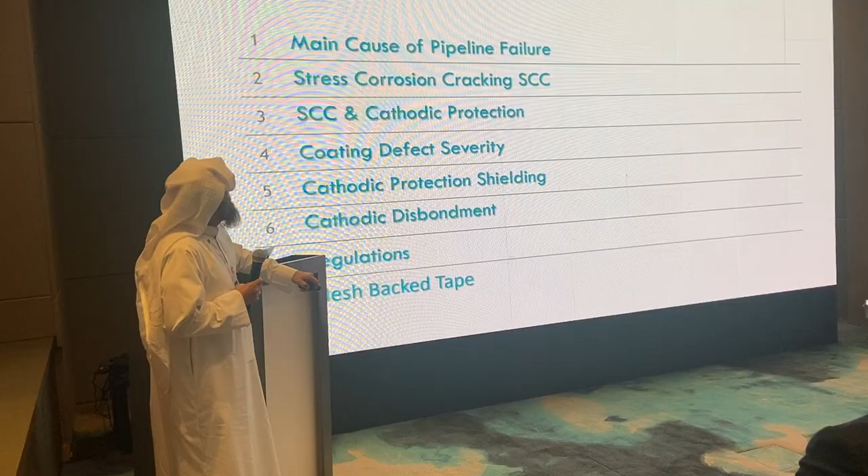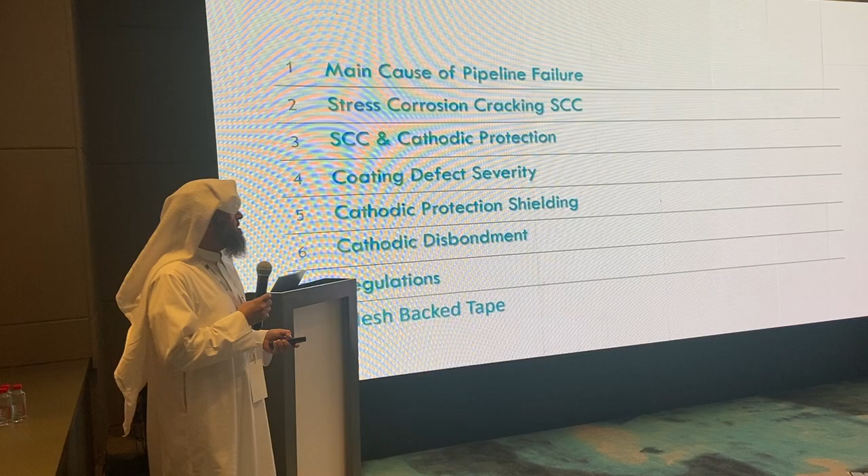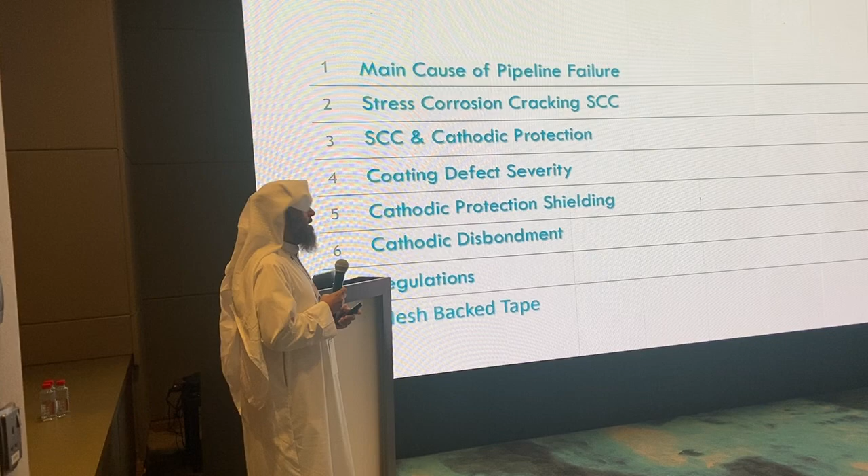This is an overview of my presentation. I'll talk about the importance of the subject, then focus on stress corrosion cracking as a main cause of pipe failure. After that, I'll discuss the relation between stress corrosion cracking and cathodic protection, then coating defect severity, ranking the most severe to least severe defects. I'll talk about cathodic protection shielding, define it and explain its importance, then discuss cathodic disbondment, regulation changes, and finally mesh-backed tape.

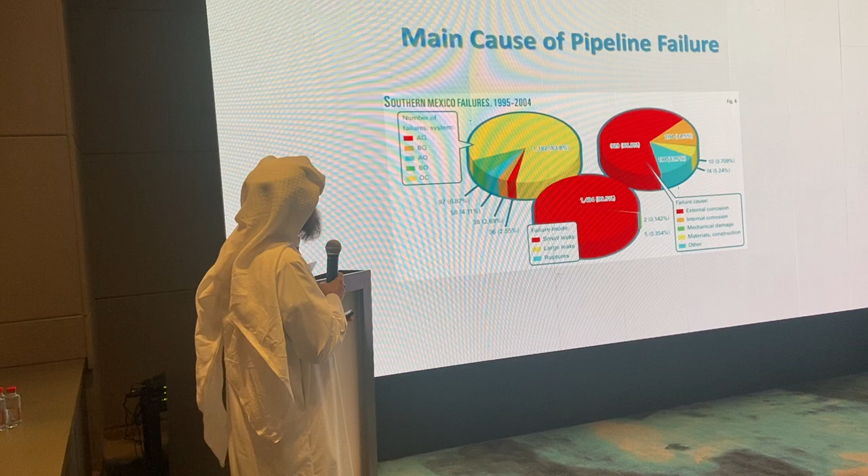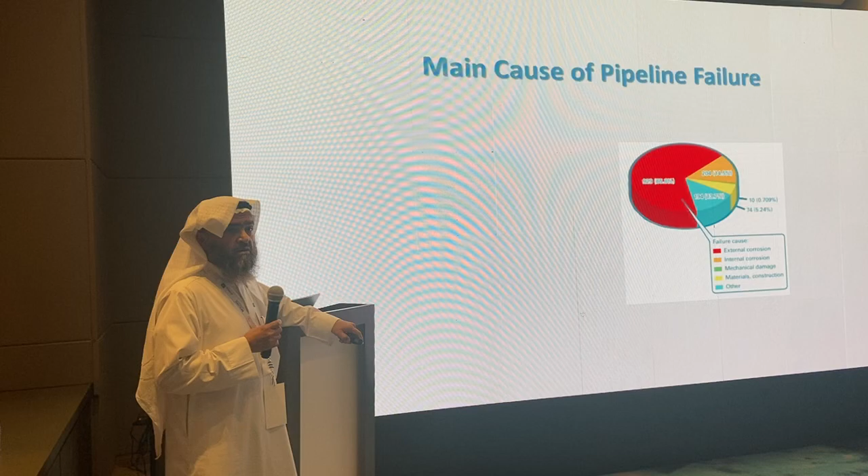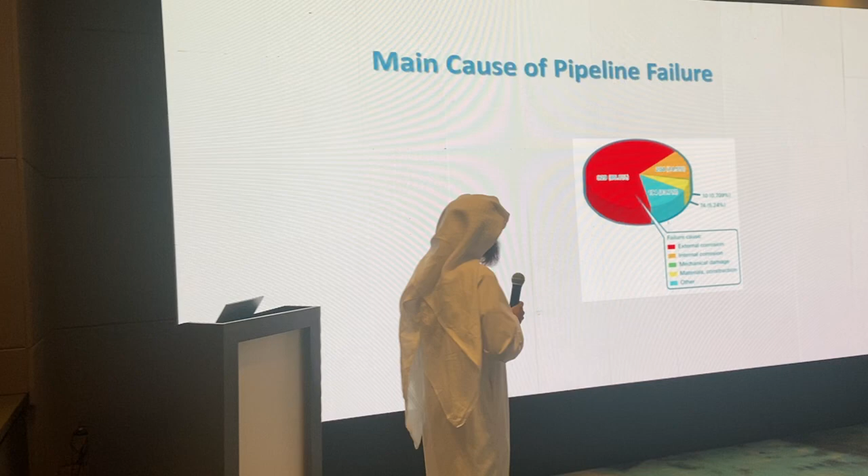This is a study carried out in the southern part of Mexico over 10 years for a gas pipeline. In this study, they observed that two-thirds of the failures are caused by external pipe corrosion. Most UT detection methods only find internal corrosion, which is very minor and minimal. Two-thirds are from external corrosion, and internal is only 10%, shown as the orange portion.

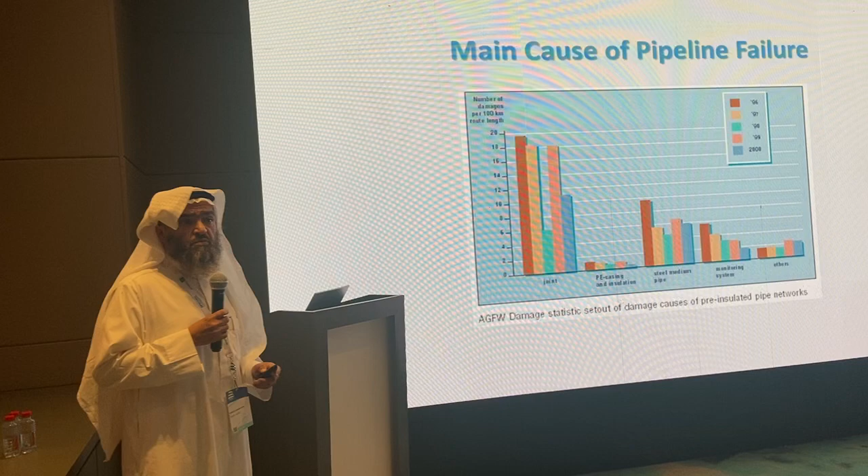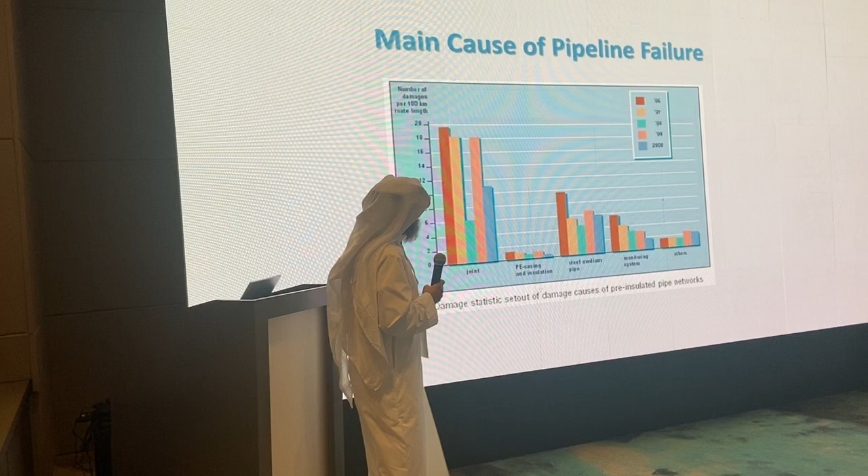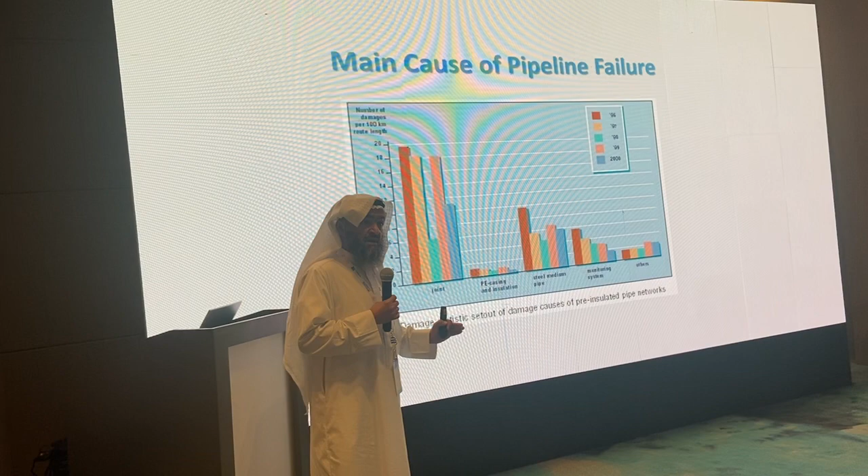This is another study in Germany over 5 years, and they observed that most of the failures are caused at the pipe joint. If we combine these two studies together, we come to the conclusion that girth weld external protection is the vital part of your project, which doesn't even cost 1% of the total project cost.

As I said, stress corrosion cracking is the most important corrosion cause that makes pipes fail, mainly because it is catastrophic and unpredictable. You might have a failure in your pipe system in 2 or 3 years from starting operation. The main cause of stress corrosion cracking is the availability of CO2 in your soil.

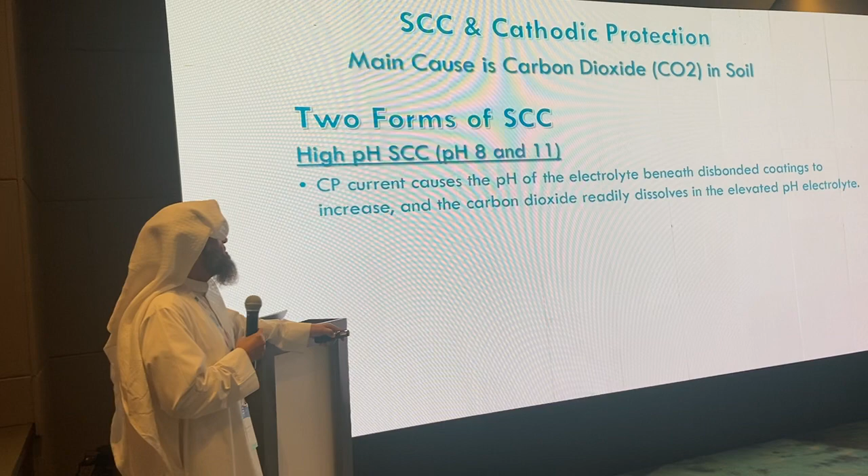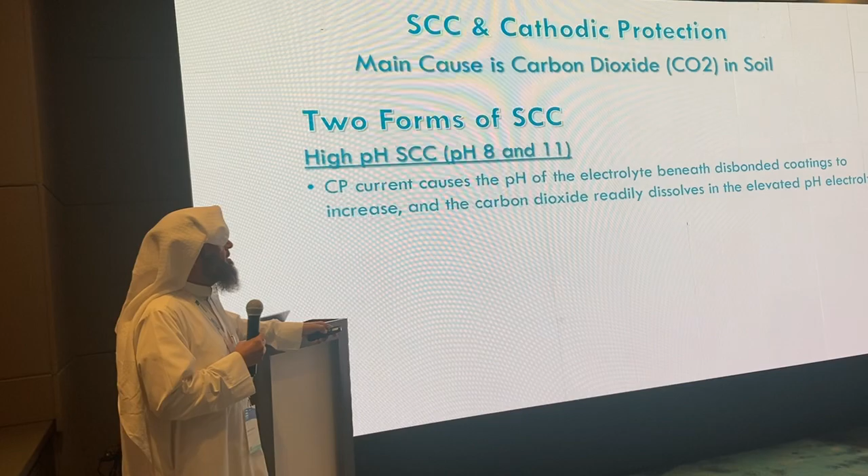There are two types of stress corrosion cracking. High pH stress corrosion cracking, where the pH is above 8. In this type of failure, the CP current causes the pH of the electrolyte beneath the disbonded coating to increase. This increase in pH makes the carbon dioxide readily dissolve in the elevated pH electrolyte. Also, excessive CP current causes cathodic disbondment.

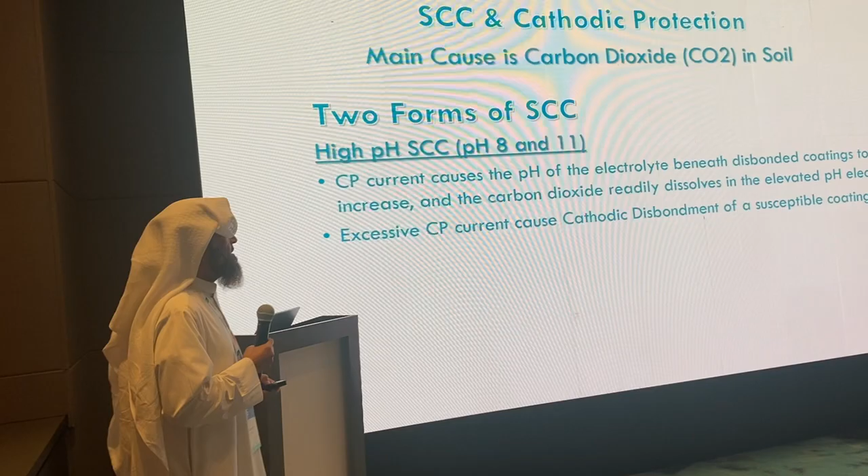Susceptible material can disbond. If you know what cathodic disbondment is - if you put two layers together and adhere them, because they are made of different materials, if you pass a current through them, there will be a field that causes a repulsion between these two layers. This repulsion depends on two issues: one is how electrically resistant these materials are.

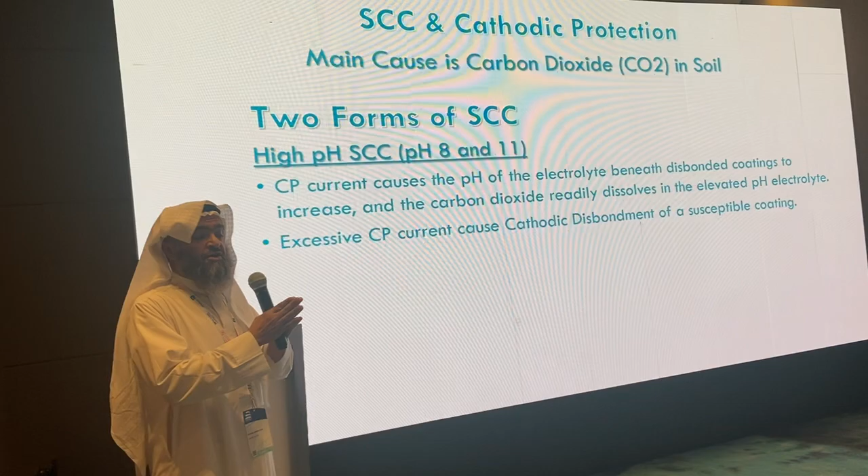Second is the adhesion between these two layers. So to minimize cathodic disbondment, we need to use materials that are electrically isolated, have high electrical resistance, and have very strong adhesion between the two.

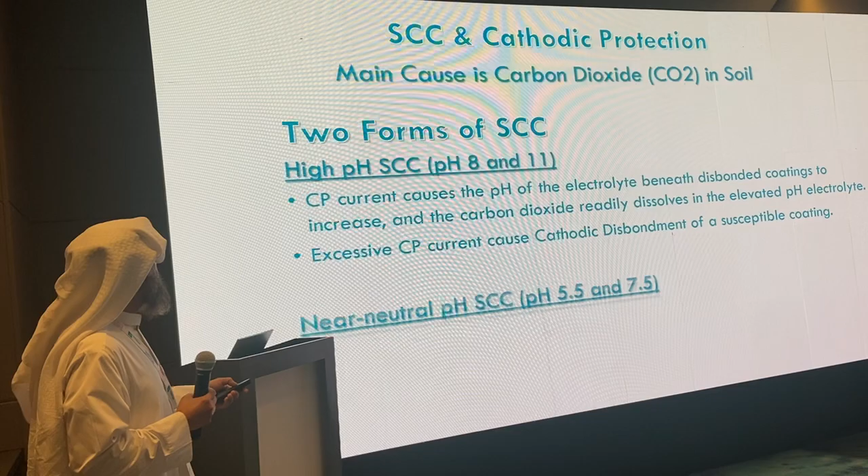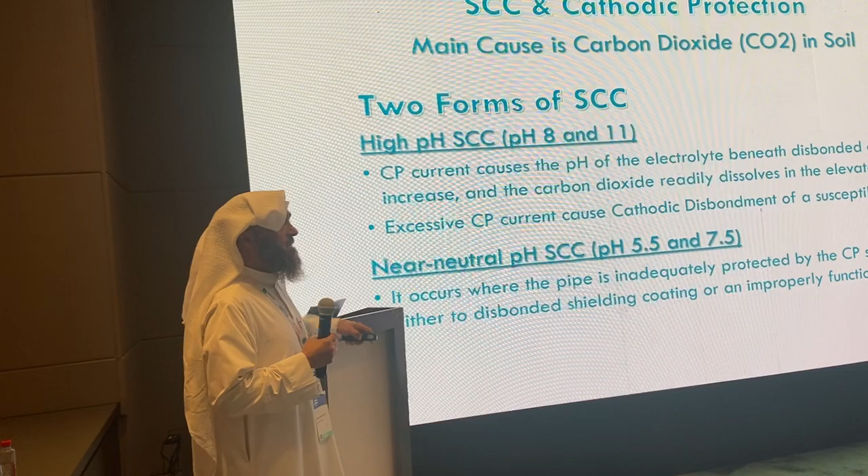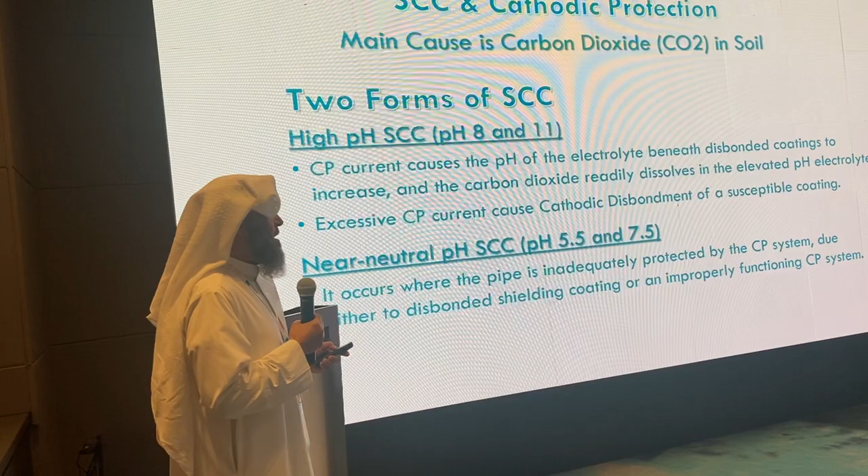The second type is near neutral pH stress corrosion cracking, where the pH is less than 8. In this type of corrosion, it's mainly inadequate CP reaching the steel substrate. So if you have either disbonded coating or the CP is malfunctioning, you will have this type of stress corrosion cracking.

FBE is known to conduct CP because its electrical resistivity is very low. So if there is no holiday, FBE will not cause corrosion and will not cause shielding of the cathodic protection.

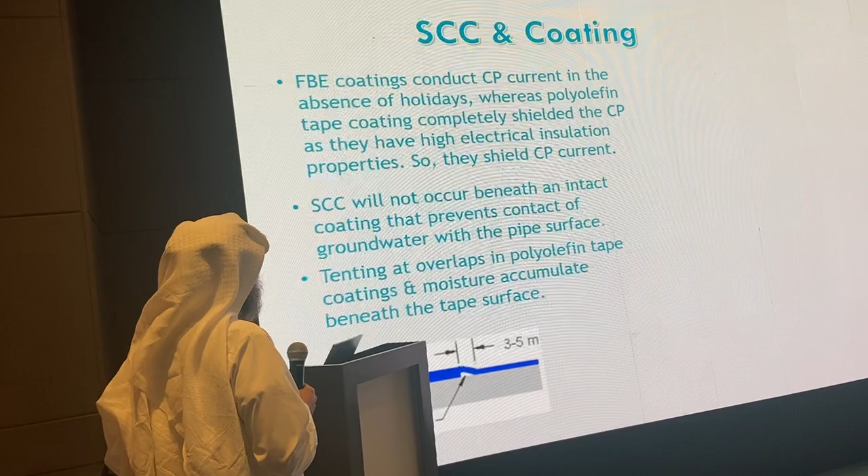Whereas all polyolefin tapes do shield CP because their electrical resistivity is very high. Did you know, for example, the HSS heat shrink sleeves are tested at 25 kV? Stress corrosion cracking will not occur beneath an intact coating, so good adhesion will prevent shielding of CP.

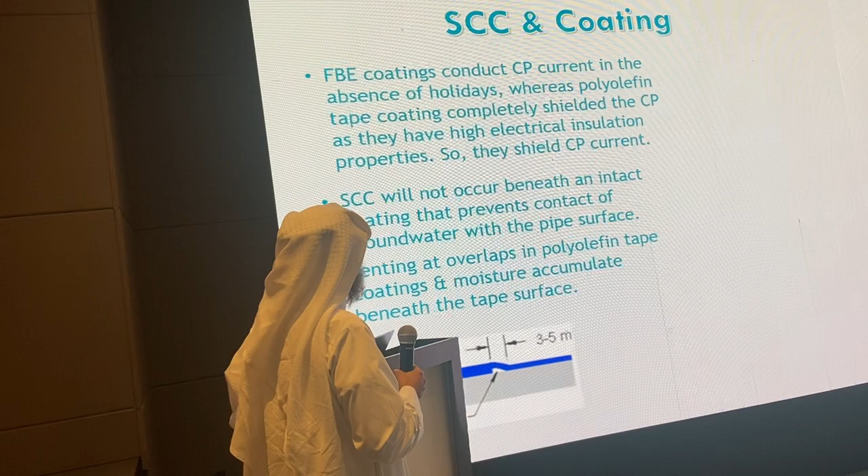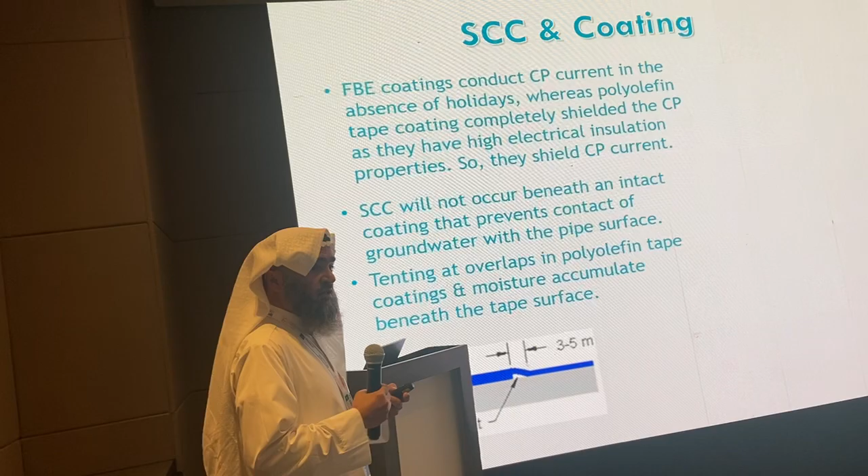Then tenting at overlap in polyolefin - you can see the picture where you have a tent because of the tape. These tenting locations are where water accumulates, humidity increases, and electrical resistivity increases also.

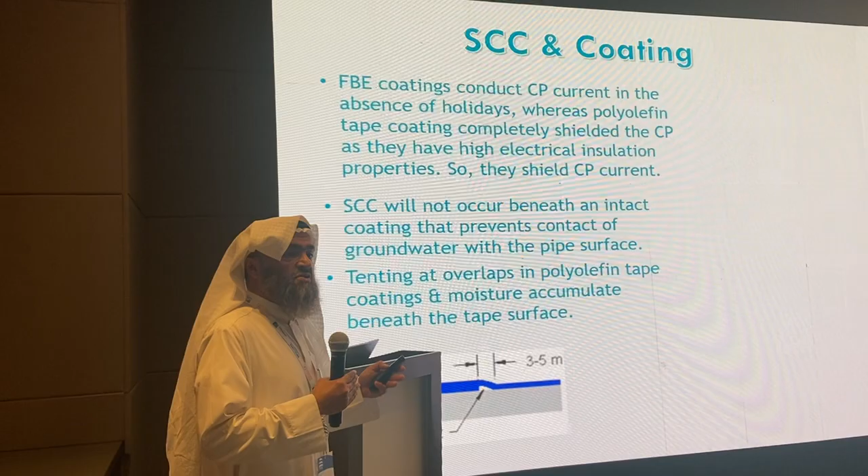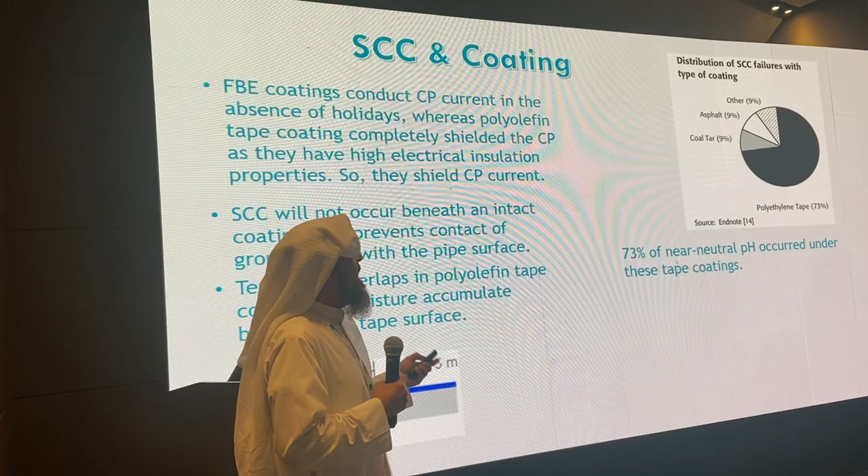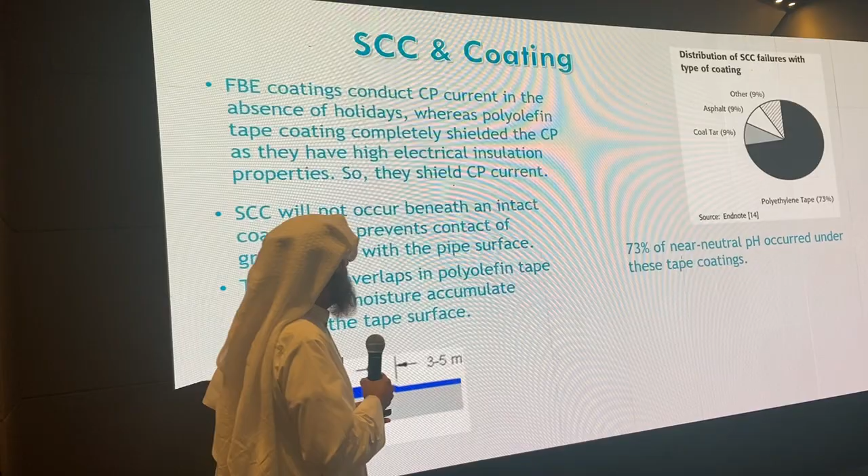73% of near neutral stress corrosion cracking occurs with polyolefin tapes. 73%, two-thirds to three-quarters of the failures we get are from using polyolefin tapes, including PE, PP, PVC tapes, and tapes that are outer-wrapped by PVC - all are included in this.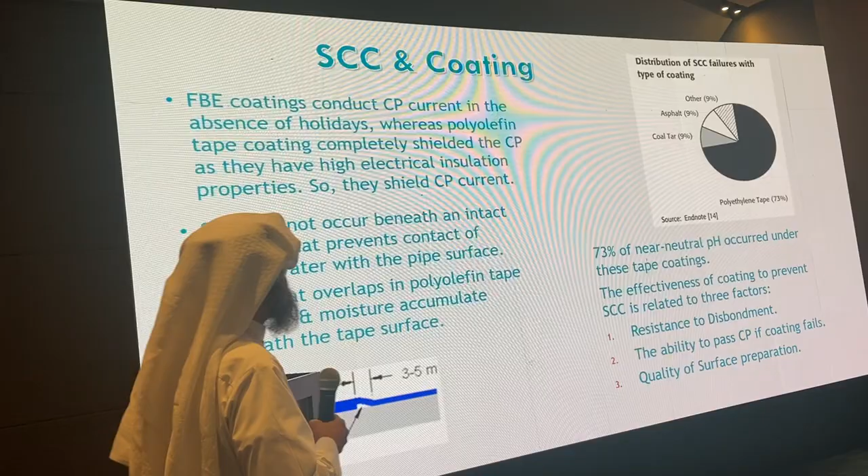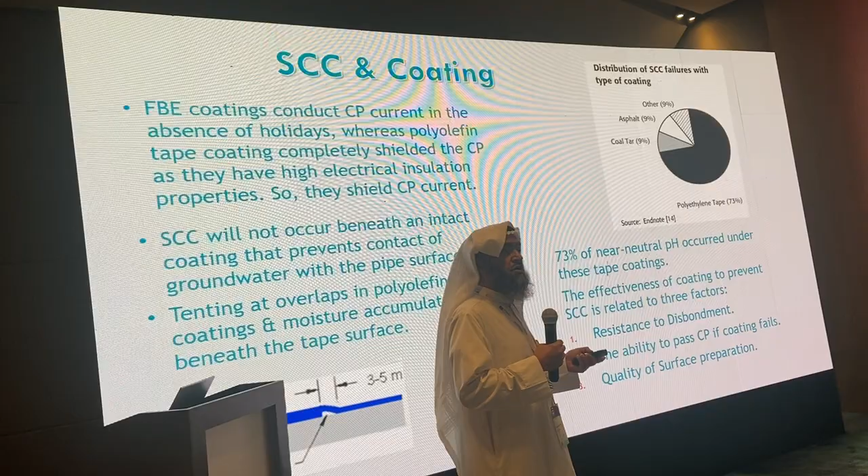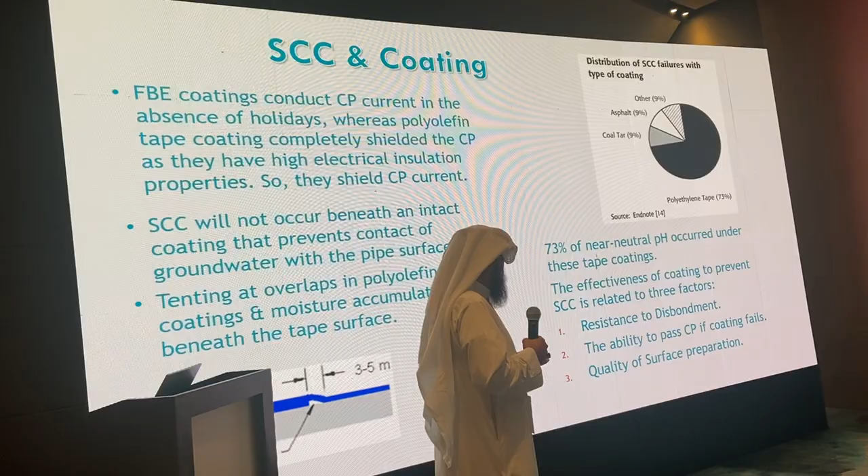So to eliminate this effect and make the coating more effective, we need to resist disbondment through good adhesion, by using coating that has less electrical resistance. Second, to encourage or support the CP current through the coating, what's called fail-safe, which I will talk about, and then the quality of surface preparation.

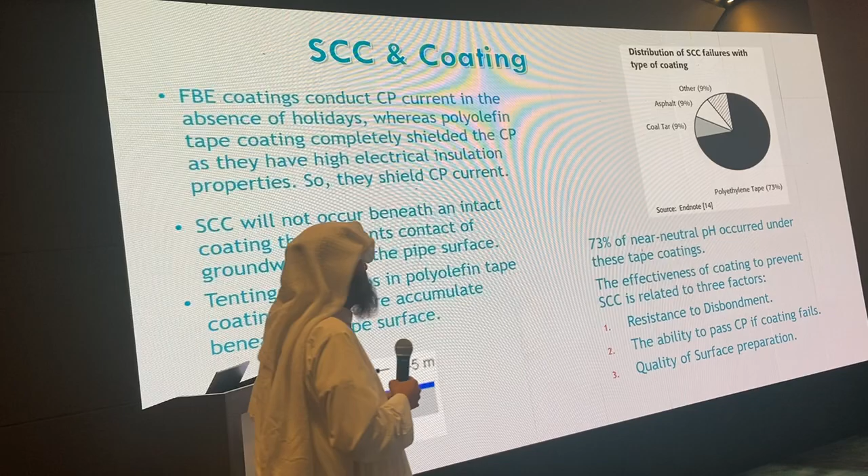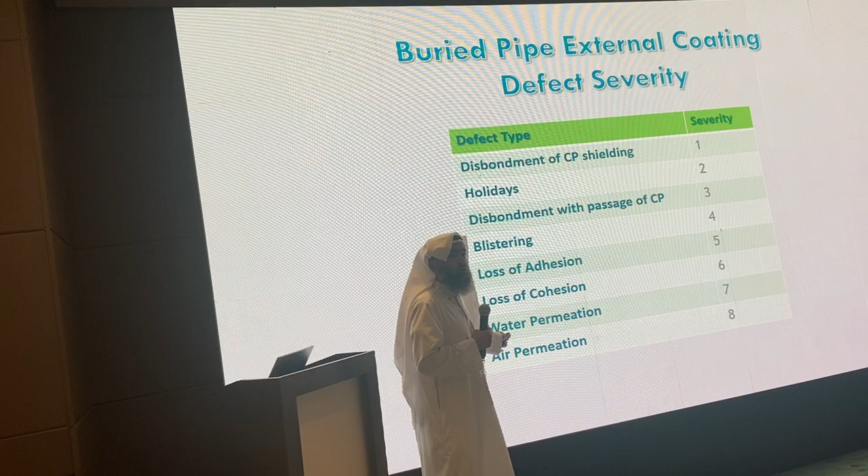These are the list of the severity of coating defects. We used to think that water permeation is the main cause of corrosion, which is not actually true. The main cause of stress corrosion cracking in general and localized corrosion is disbondment causing CP shielding.

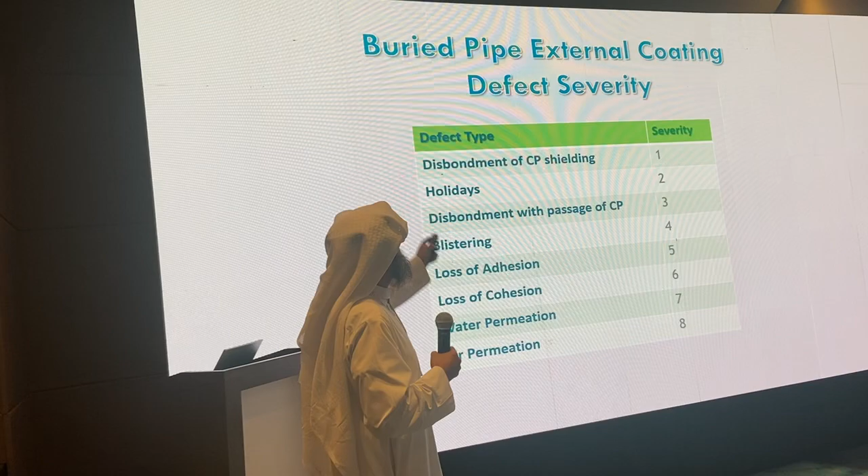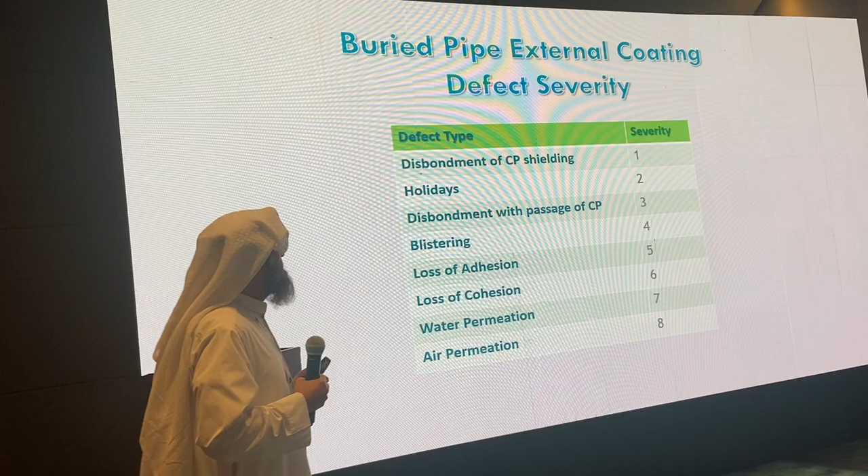Second is holidays. Third is disbondment of coating that gives little CP passage. Then blistering, loss of adhesion - which is very important - loss of cohesion. Then last is water permeation and air permeation.

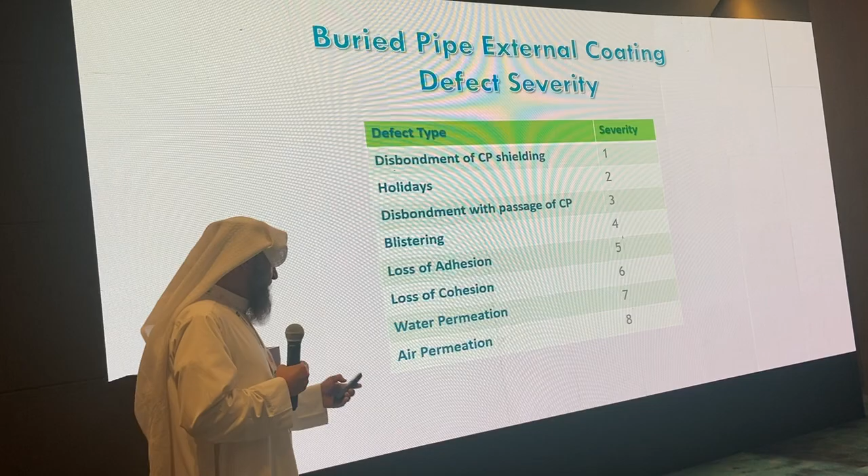Now, what do we mean by cathodic protection compatible? We mean that if the coating fails, it will allow the current of the CP to go through. If it protects or prevents or shields the cathodic protection, there is no use then to use the cathodic protection.

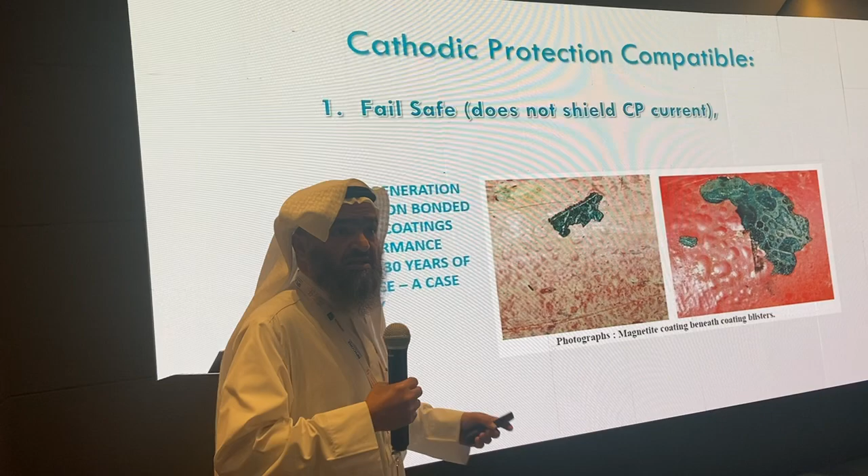An example of fail-safe material is FBE. This is a first generation of fusion bonded epoxy, where, as you can see, it is very poor type with a lot of blisters. Nevertheless, there is no corrosion - it's all black magnetite, no trace of corrosion. Why is that? Because FBE doesn't shield your cathodic protection.

Second is to have a coating with minimal cathodic disbondment. How to get that? First, use a coating that has low electrical resistivity. Second is to have a very strong adhesion.

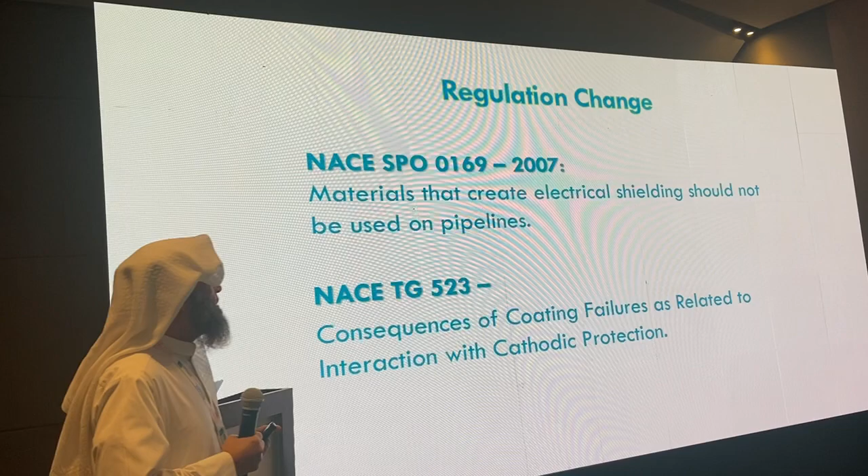Now to the regulation. I took these regulations as copy-paste from their website. In 2007, 15 years ago, the United States recognized the problem and stated very strict regulation on this. For example, NACE says material that creates electrical shielding should not be used on pipeline, period. They even created a task group to study the consequences of coating failure as related to interaction with cathodic protection.

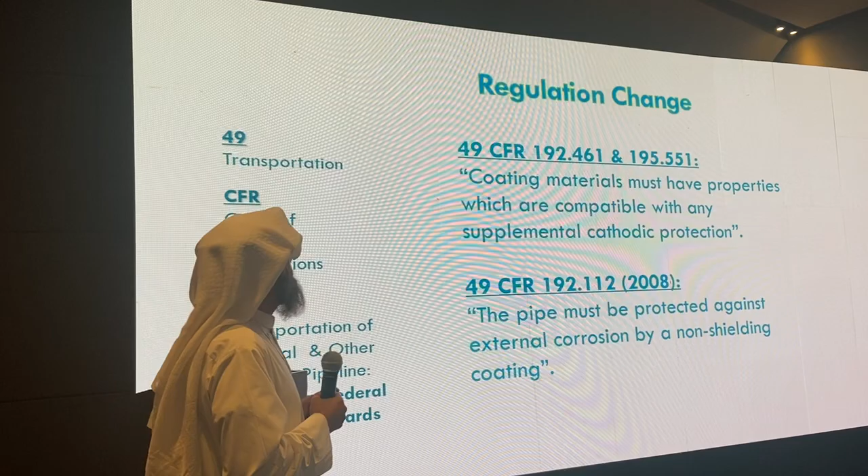The Code of Federal Regulation in the United States, also in 2008, put these statements: coating material must have properties which are compatible with supplement of cathodic protection. The pipe must be protected against external corrosion by a non-shielding coating.

There is no single polyolefin tape allowed in United States or Canada for maximum allowable operating pressure pipeline. They are not operating anymore there, they only operate in our area. Again, the pipe must be protected against external corrosion by a non-shielding coating.

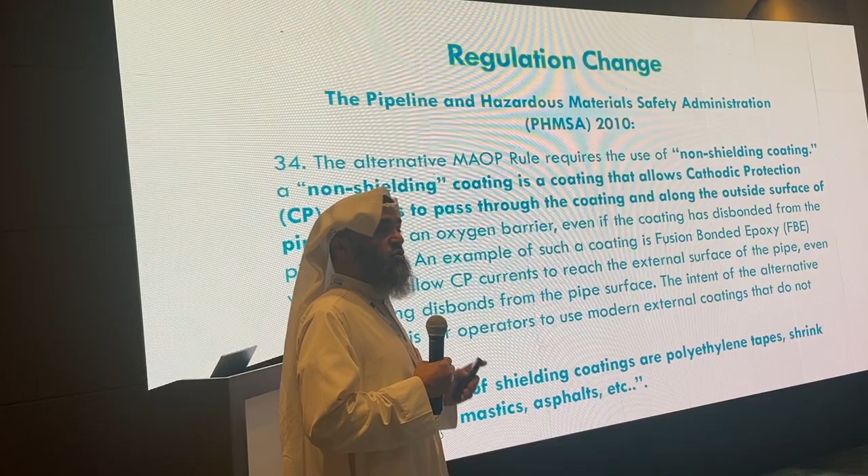Now the Pipeline and Hazardous Material Safety Administration, PHMSA, in 2010 put this rule which stopped all polyolefin tapes or heat shrink sleeves from being installed in pipeline in North America. The alternative maximum allowable operating pressure rule requires the use of non-shielding coating.

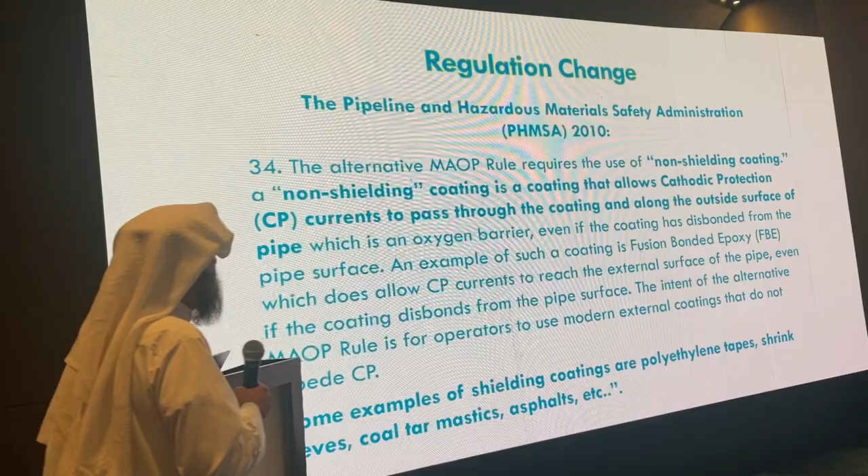A non-shielding coating is a coating that allows cathodic protection current to pass through the coating and along the outside surface of the pipe, which is an oxygen barrier, even if the coating has disbonded from the pipe surface. That means if the coating disbonds, the current should still pass through.

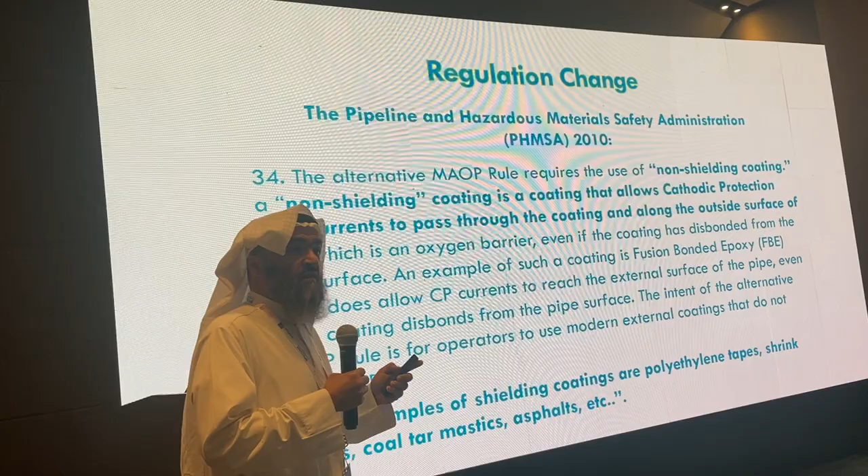You shouldn't put a system with two defense lines where, if the first defense line fails, it prevents the second line from operating. And this is what's happening with polyolefin.

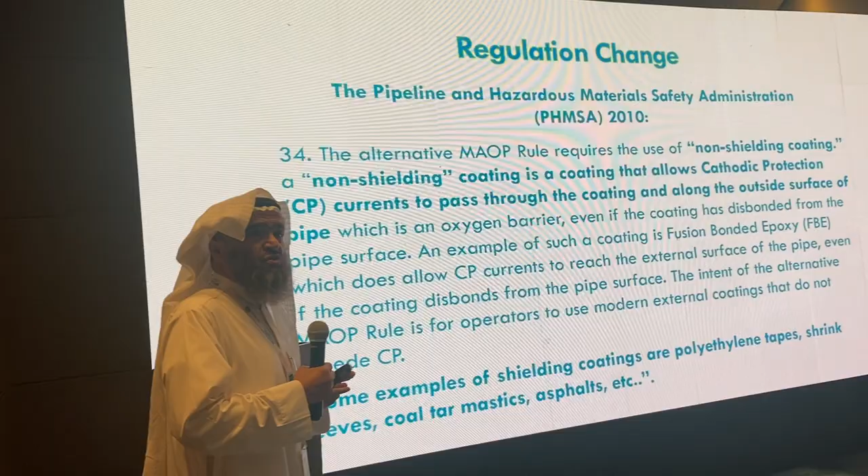Polyolefin, by the way, it's not only these — also PVC outer wrap, what you call viscoelastic material, is included in this.

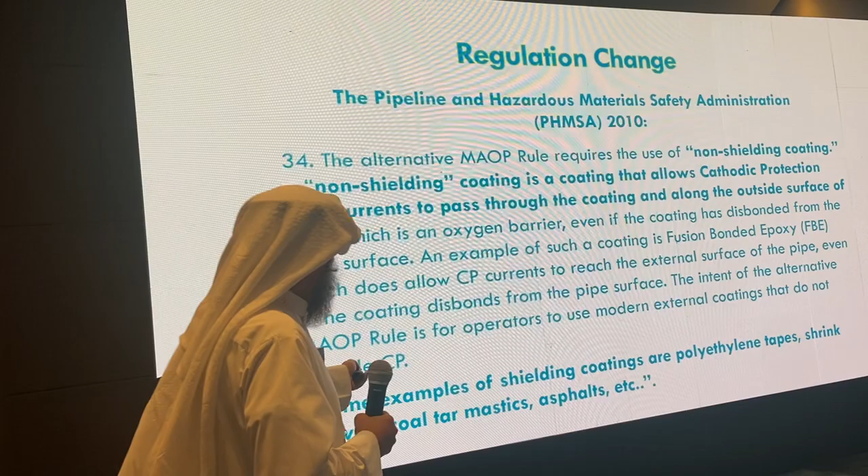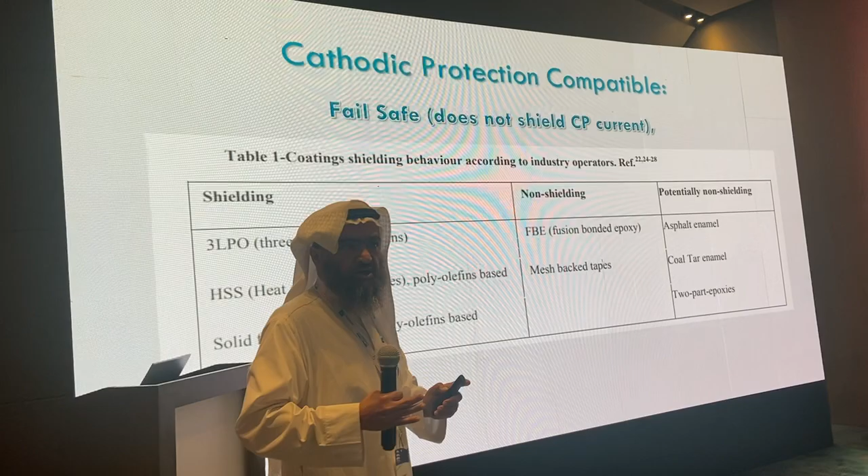Then they give an example of shielding material — some examples, gentlemen, I copy-pasted, I didn't write this: polyethylene tape, shrink sleeves, coal tar mastics, asphalt, etc. This is also from an article I took. In this article, they define which materials are shielding, which are non-shielding, and which are semi-shielding.

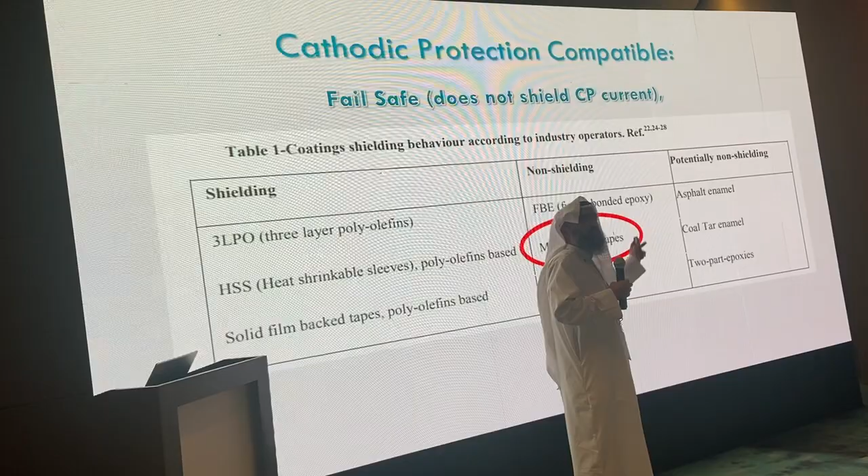Non-shielding: FBE and mesh-backed tape only. These are the only two tapes or protective coatings that don't shield cathodic protection. Semi or partially non-shielding: asphalt enamel, coal tar enamel, and two-component epoxy coating.

What is mesh-backed tape? Mesh-backed tape is a composite of bitumen plus continuous filament of thermoplastic fiber that gives reinforcement. So this film of bitumen doesn't sag like viscoelastic material because it is reinforced by thermoplastic.

More than that, it has a wavy meshed polypropylene reinforcement. This wavy shape allows for the following: first, cathodic protection current can pass through. Second, it is reinforcement because this polypropylene is twice as strong as polyethylene. Also, because it is mesh and wavy, the crack doesn't propagate.

Third, it extrudes compound in overlap. Now, to install this type of tape, we use a machine wrapping. That machine wrapping assures the force of tension that forces the bitumen to come out from the mesh and adhere to its secondary layer. So it is compound-to-compound adhesion. It becomes one piece, one sleeve.

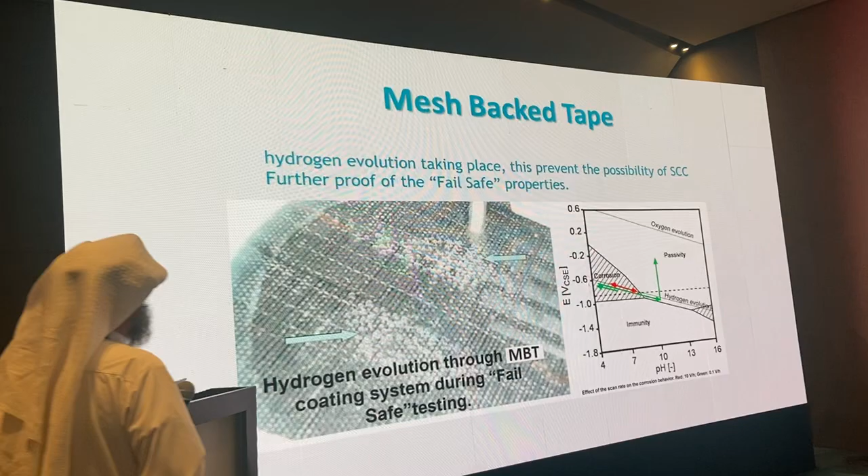It's not a tape at all. Here you have hydrogen evolution taking place, which proves first a stress corrosion protection prevention, and second, a fail-safe property.

This is a third-party inspection laboratory who tested the material, KTA Tator in Canada, and they assured a minimum of 3 Newton per millimeter adhesion on steel at 23 degrees.

Gentlemen, this is the strongest tape available in the market. There is no other tape that can provide you with 3 Newton per millimeter. By the way, this is a very conservative number. Myself, I tested 5 Newton per millimeter, and I can show you on video in projects here in Saudi. It can reach 7 Newton per millimeter. What we do, just to be conservative, we say 3 Newton per millimeter.

What does 3 Newton per millimeter mean? It means 3 times the European standard, which asks for 1 Newton per millimeter on steel at 23 degrees. It's also 3 Newton per millimeter on FBE, which you cannot at all get from other coatings.

So, to conclude, to have unshielding properties or to prevent your pipeline from stress corrosion cracking, you need 2 factors: first, CP non-shielding; second, very strong adhesion to prevent cathodic disbondment. And you get it only from this mesh-backed tape.

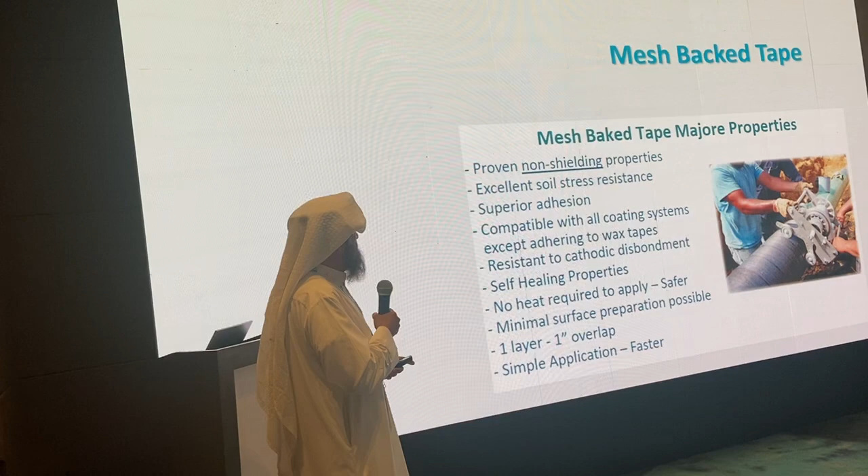So what is mesh-backed tape? It's a proven non-shielding property, excellent soil stress resistance because of strong adhesion, superior adhesion, compatible with all coating systems, self-healing property, non-heat required, minimum surface preparation, only 1 inch overlap so it saves money, and finally it is very simple to apply. You need a manual wrapping machine that maintains strong adhesion.

If it is a very long pipeline for rehabilitation, we can use a machine-operated wrapping machine.

All right, any question for Mr. Hamad? Can I ask a question? How many of you are customers — I mean Aramco, SWCC, Witico? One? Okay good, because I am very upset really. Yesterday I had a presentation there, no customers, all suppliers. It's really very upsetting. Thank you. All right.